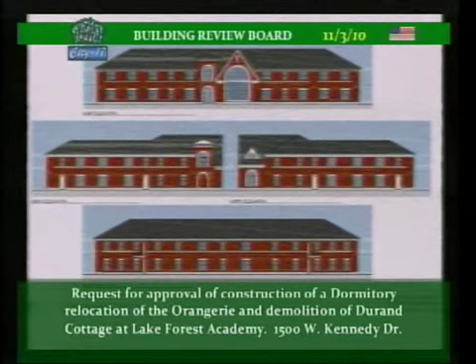The first was the window on the front elevation we had looked at—my battery's not so good, but basically the center window in the front. The thought was that the proportions of that window were a little peculiar and a little large, and we thought so too.

Oh, great. Right there? Oh, that was good. Thanks.

Okay, there we go. In terms of scale, proportion, and how it was subdivided, this was a little peculiar, and we've come up with a different solution, one more similar to what was done in Atlas and some of the older buildings. It's smaller in scale—you can't really see a person here, but a person is about 6 feet high, about that big. So we think this is a better solution in scale and proportion to the mass of that piece. The next is the site plan.

This is the original site plan we were proposing in our first proposal. You can see the parking that was here, the building location is here, and these were the trees we were trying to protect.

We met with the forester out there, and we concluded that this tree and these old maples along the old wall line are really not worth saving. They're in rough shape and have really lived their life, so it would be better to move the building east 10 feet to protect these—there's a couple of ginkgo trees and then these 3 large elms here. There are also 2 trees in this parking area which are not in very good shape, so we can consolidate all this parking.

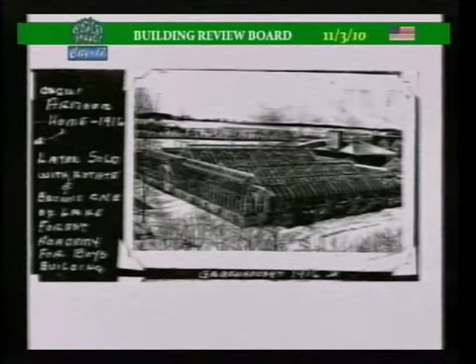And what our thoughts were was on that location, this is the greenhouses, this is the cottage that we're proposing to demolish, and then these are the old greenhouses, and this is the orangerie behind here. So when you were standing out in the formal gardens, which is to the left here, you'd look over top this, and you would just catch the top edge of this building.

So actually those pineapples on top of the building were pretty important, because you'd see them from the formal garden and see them over that way.

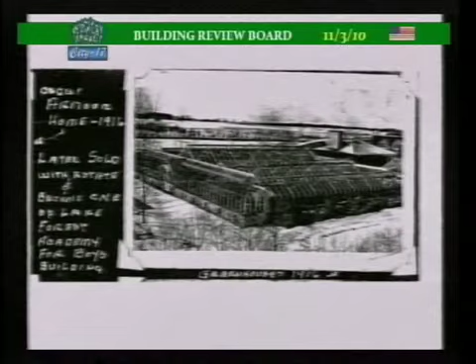I didn't really think about it that much, but as we looked at it more, this is just an original garden plan. So just to show you from a plan view, the orangerie is right here, the formal garden's here, and that greenhouse complex is in front of it. So you would stand here and look over top of it and see that front elevation that way.

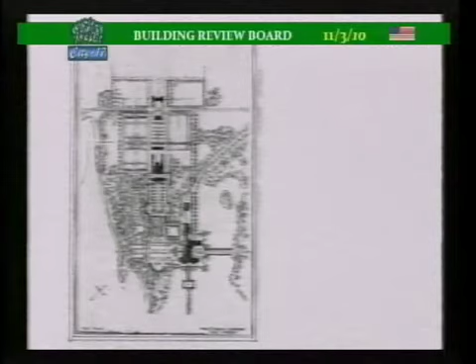As we studied this, we looked at it and said, you know, basically this is the front face, this is where it sits today, and this is where the formal gardens was. We were originally planning on taking the building and just scooting it this way and having the front face actually face west.

Well, we thought it would make more sense to move the building, flip it 180 degrees, and have this face out to the main green space, which is out here, so that when you walk down the axis of the different roads, you could see this building over top the one-story building, which would show those pineapples on the top edge of the building in the same way that it was over here.

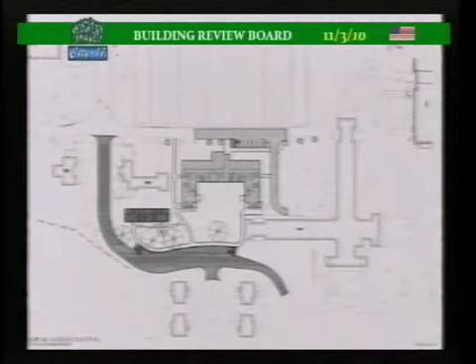And we said, okay, well, does that really work? So we did a quick little massing sketch. This would be if you're standing across the field hockey field on the other piece. That line is the one-story building addition that's onto this, and you see those pineapples on top and just the top edge of that building.

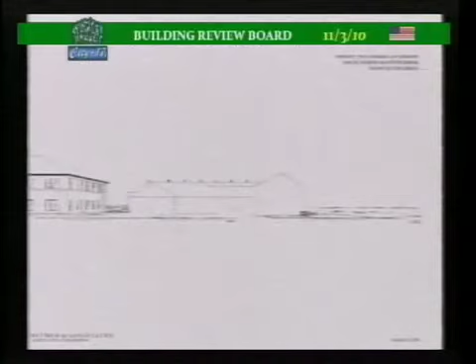So we think it makes sense to flip the building, have the front face the green in the public space here, and have the back, which is going to get hidden anyway with our back porch structure on the building. So we were proposing actually to turn the building 180 degrees from what it was and put the face front toward the open space.

The last thing we looked at in terms of the elevations was this is what we proposed originally, to have straight windows, and it was asked if we would look at integrating arches into the elevation, much like was in the original building. The original building was a one-story space, so they didn't have this floor line to deal with. All these windows were arched that went along here.

And we looked at 3 different schemes. One was if we just had arches, straight arches.

And this is back when we had the back of the building, which is this. You can see these piers don't come up all the way, as they are here. So that was our first scheme.

Our second scheme was if we were not to create the brick arches, but just infill the flat space. You can see these squares, that's where the flat windows are, and we had these little arch windows along in those residential units in the bedrooms. So those were the two arch solutions we came up with.

The economics of this: the first scheme is more expensive because we have to actually build these brick arches. We have to pull out the windows, build brick arches, and then stick the windows back in. So that was about a $40,000 to $50,000 upswing for that.

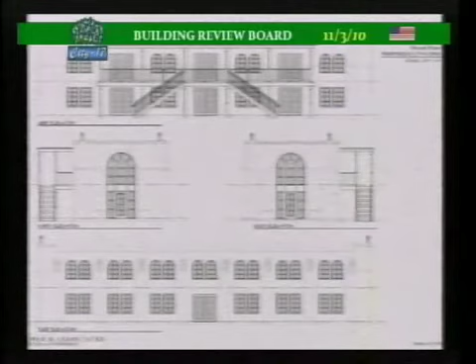In all the schemes, we still think the end elevation makes a lot of sense. We've subdivided it differently so that it really matches what we're planning on doing, or relates better to what we're doing in Ferry Hall, and we think it makes more sense from a historic standpoint too. This is the scheme that we're proposing, I think, that makes the most sense.

Why you'd save $50,000 or $40,000 isn't a lot of money in the grand scheme of things, the whole project, it isn't - but it does become a lot of money when we have a finite amount, and so where does that money come from? We have to take it out of the landscape budget or some other budget like that can be somewhat elective. So what we had $100,000 in for landscape now becomes 60 or 50,000. It really has an impact on what we do.

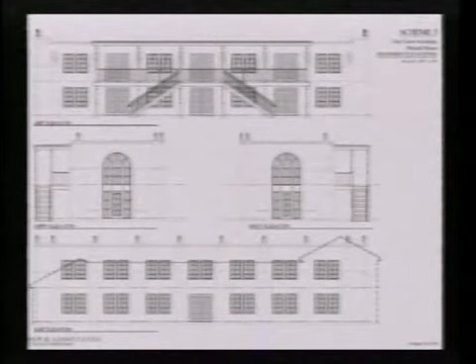This shows the building flipped around, which has the columns faced out to the street. This dashed line is the single-story Macintosh building in front of it. So you can see how all these windows you don't see from the center green at all, whether they're arched or straight. We use this just to indicate that.

The last piece was just a little better detail on our back porch detail. Basically what we're proposing is to use a whole steel structure so that these will be pipe columns and tube sections, which create the outer pieces. This will be metal deck underneath with a concrete topping, metal steel railings. All this will be painted a dark green or black and really somewhat disappear in terms of the elevation. So that was the last piece that we had.

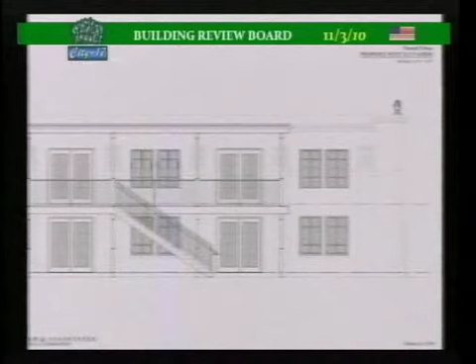The last thing we wanted to talk about was the demolition permit. I think we're comfortable now with a 2-year period. There was some question in our last meeting about the time frame for when we would tear down the building, the cottage, what we were proposing. We're comfortable now with a 2-year period after we finish the completion of the dormitory to demolish the cottage after that.

I think that pretty much covers the questions that I was aware of. If there's anything else, I'm happy to answer.

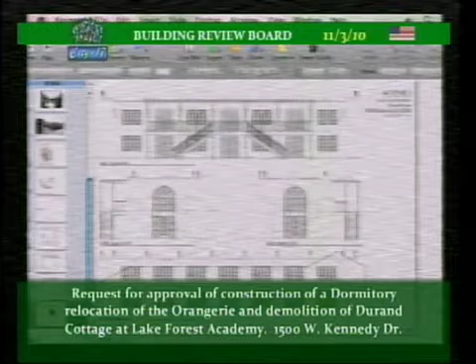Regardless of flipping the building, if you look at this, you see the piers on the east elevation, right? Right. And the buttresses on the west. Now go back to your other schemes. Yeah, and this is the opposite. That's the opposite, correct. So is one incorrect?

Well, one is taking the building one way and moving it, sliding it this way, where we don't flip the building 180 degrees. And the other would be flipping the building 180 degrees and putting it in place.

So as we look at this, we can interchange these things. Is it the piers we like, or is it something else? We tried to say, okay, what is the most important thing? Where do we get the best bang for our buck?

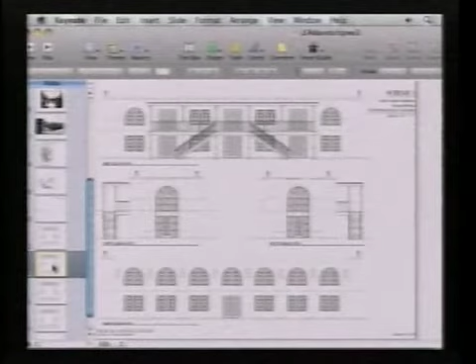Okay, and I thank you for the cost estimates. Does that make sense? It is a little bit confusing. But I'm not sure that's going to factor too much into the way I'm going to view it. I'm here to look at the aesthetics of it and make my recommendation based on it.

And then my other last question was the sidewalk that you said you took out. I'm just curious, and I'll pose it in the form of a question, whether you think people are gonna walk across the grass to get from sidewalk point A to point B, or if they're gonna go the long way around.

That's how we arrived at where we were. I was really thinking that, one, were people really gonna walk from the campus, come through here, down through here, and across here to get this way? If you really see the way that people get to West Campus or West Village right now, what they do is come down here and walk through a path that's right here. So it's more direct to go this way than through this and that way.

The other thing is, if we don't encourage people to go this way, we don't have them walking through a pretty tight area, basically the front of these residential units. It's better if they come this way. So that's why we eliminated that one.

The other question is whether people will park here and walk through this way to get through there. I would imagine they would, but I still think it's better to have foot traffic over those root systems than it would be to pour concrete over it. So I think it makes more sense to do that. That's it, thanks.

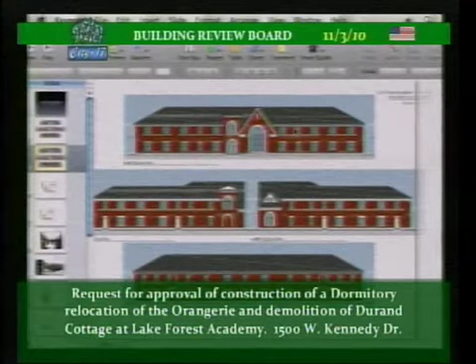We looked at that in terms of the number of spaces provided and the number of faculty units there. We went back and counted the number of spaces we need for faculty here. One nice thing about this parking area is there's no student parking and no parent parking - the only people who can drive back here are faculty, so that helps a lot.

One consideration is the safety of moving people. When parents come to pick up their children from the dormitory, they have to come through this area - that's really what this is. They're not allowed to go back through here, and students aren't allowed to park anywhere on this side - they have to stay on the other side of campus. That helps a lot.

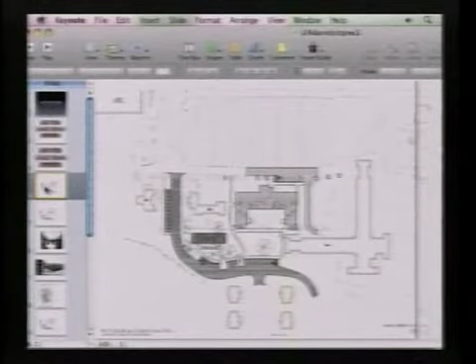The other consideration is that the number of parking spaces we need to provide for faculty - we feel this is adequate. If we were to develop this space in the future, we would have to add parking for additional housing that might go here. By eliminating this parking here, it helps the drainage situation we're creating, and it's much less intrusive into the existing structure. This house still has its 2 parking spaces, and it'll still work as it is today.

So all those will work the same. And then all these parking spaces will have spots for the faculty - there's 4 here, and then there's 6 there. Okay, I think we're fine with those.

So the parking for the gym is adequate, and at this point you don't think you need it for overflow? Would you allow the public to come back here and park? Basically, the overflow parking is in that lot coming down the other side. When they have an event, like the holiday event, or a big event, they actually park in that field. You can park in that field, and that's kind of how they handle that situation.

I had 2 more quick questions. Go ahead, John.

Peter, as I look at the elevation for Ferry Hall, on the bottom of the building it looks like there's something more than just the concrete foundation projecting out of the ground. Is that a limestone base? Yep, we have a little stone base that goes around the bottom. It's cast stone, the same that we use in the gym - basically it looks like limestone. Does that hold up to weather and drain okay? I mean, too many times I see limestone down at the base and it looks like it cracks pretty bad and falls.

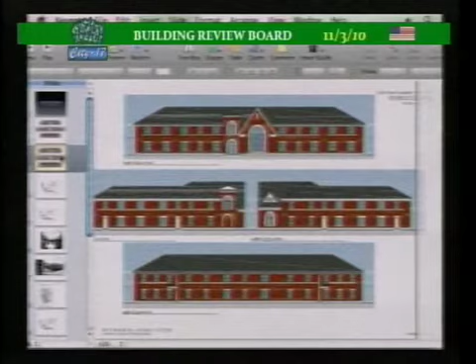You'll see them, you'll see them if they're white - it's white against black or white against red, so you'll see 'em. Would you be in favor, or have you considered doing a color to match the brick for the downspouts? I don't know - we have the windows, and the windows are going to be white too, that's what we have in the gym. It seems to make more sense to do it like the trim color.

Okay, no other questions? Charlie? One question, Peter. If you could bring up the site plan.

I believe when you were here last time, there was a wall remnant that ran from the original estate just to the east of that. Now, with moving this building about 10 feet, are you encroaching on the wall? You kind of had some vague idea what you wanted to do with the wall - what's the thinking on that?

We met with Susan Benjamin, trying to go through this and think through what are the relics of this thing and how it's significant. Her idea was that turning the building and that sort of thing was way more important than preserving the foundation of this wall. So now we're taking it all out.

I actually think that by saving that foundation to go along here, it just becomes kind of a safety hazard - kids trip over it unless we do something with it, and it's really sort of in the wrong place. In the future, we might consider a path that goes through this way to future things between those two, and we still have enough space to do that.

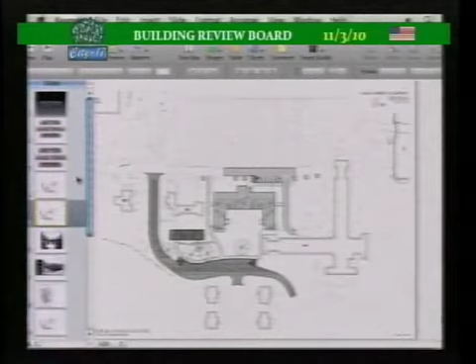I have one question for Monica. I think in our last meeting you questioned the size of the brick being used in construction of the dormitory, whether it matches the athletic center.

Yeah, I was questioning if it was matching the athletic center, and then I was pleased that he said it was going to be a smaller scale brick, which I think is appropriate because the dorm is a residential facility, whereas the gym has the bigger, larger jumbo brick. Is that true, Peter? Yeah, I feel exactly the same. I see that big jumbo brick and it looks peculiar.

Okay, I think we've covered it with questions.

Now is the opportunity for the public to comment on this project. Is there anyone who wishes to step forward and address the board? Seeing no one...

It is now time for any final questions from the board before we take it to discussion. I think we've been pretty thorough in our questions. So now is the time to deliberate.

Well, I like that I'm seeing 3 schemes here, and I appreciate the effort on estimating prices and presenting that to us for consideration. Of the 3, I'm not liking the double arched window, so scheme 2, I'm not a big fan of.

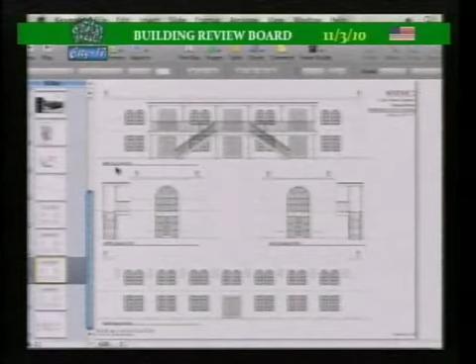But alternatively, the west elevation on scheme 1 — yeah, but that only has arches on the outer sections. Right, I'm just trying to creatively think of a way to get some arches onto one of the facades, one of the elevations. But I think we might be working too hard on this. I just think the big ends with the north and south having the big arch is really an adequate statement in itself.

So for the sides to be a little more simple - now, the sides were like the north and south at one point, were they not? Because we turned this into a 2-story building versus a 1-story. Right, and so getting back to historical significance, that was all one window to begin with, so even if you do an arch window, you're not going back to what historically was there, because it's been adapted and changed over the years.

So I think it seems our consensus is around scheme 3 as presented, right? Okay. Okay.

I'm just going to tick down the list of things that Peter addressed that we had asked him to address in our prior meeting.

Are we in agreement that rotating Durand House 180 degrees is desirable? Yes, yes. Any dissent to that position? So we approve that as well.

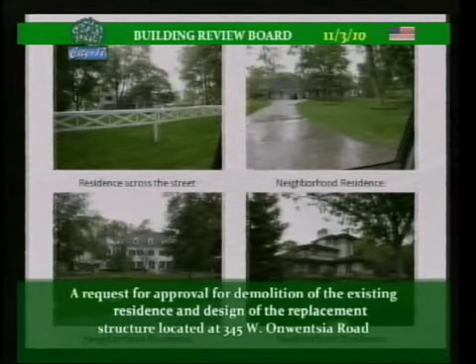Some other shots of the neighborhood across the street. There's a picket fence, a mix of styles—colonial homes—and there's actually a prairie-style home just around the bend on Onwentsia.

Some other homes in the immediate neighborhood—a mix of 2-story and 1.5-story homes. There are ranch homes on either side of 345.

So quite a blend. This diagram shows our efforts to look at trying to reuse the home. We looked at additions. Since the second-story option didn't work, we looked at other options, and they don't work either. There are some restrictions as far as setbacks from a zoning standpoint.

If you do an addition on the east or west side, those would be non-conforming to the required setbacks—you have to have 20 feet on this side. Actually, the setback on the east side is 50 feet because there is a public easement; this is actually city-owned property, which mandated a wider setback on the east side. The front setback is 50 feet. So the sides didn't work as options for additions.

There is an issue with the grading on the back of the property. It's low and the foundation is low, so adding structure on the back would exacerbate the water infiltration that's occurring in the back of the house.

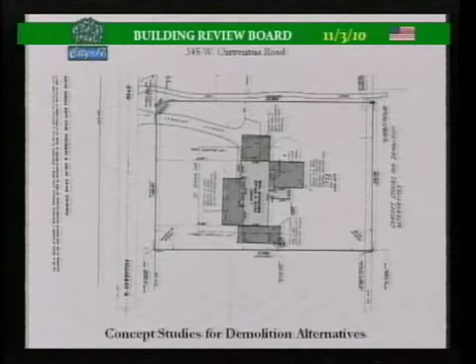And if you look at a front addition, we didn't like that because basically it would change the aesthetics of the house, and it creates too deep a house—you get too much internal space without natural light and ventilation. So we didn't like the idea of a substantial addition on the front.

So after looking at those options, and given the condition of the home—the structural inadequacies of the roof, the undersized framing, the foundation, and the amount of crawl space—it just didn't make sense to try to work with that house.

So we came up with a new design, and it's essentially shifted toward the street by 27 feet from the existing home. Part of the footprint is in the existing home's footprint. We still have 70 feet of distance from the setback line, from the property line to the front of the house—50 is required, so we're still an extra 20 behind that line. There's a significant parkway dimension too, of 20 feet, so there's a nice distance between the street and the front of the new home.

The garage is side-loaded, which is a nice feature, so the doors aren't visible from the street.

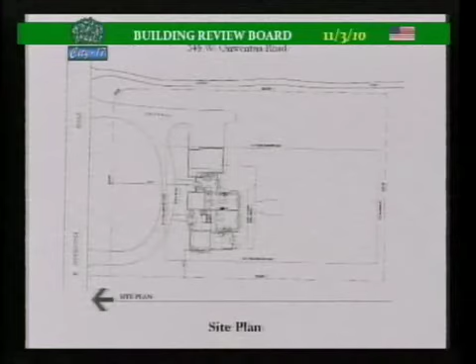I'm going to go over the landscape plan. I'm going to go to the architectural rendering of the front of the home.

So the architectural influence is French Norman farmhouse architecture, and so some of the elements, or a lot of elements that you see in that architecture is inherent in this home.

Some of the features are a rustic brick on the exterior, the use of heavy timbering around doors and windows, a hip roof, and also arched dormers that penetrate the eave line.

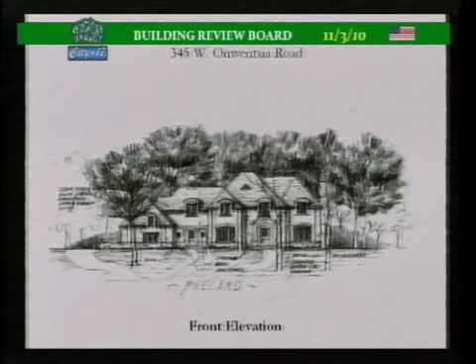So it offers asymmetrical balance and a 1.5-story look, so it kind of nestles in better, doesn't show as much elevation to the street. So I think it's going to be a very quiet home.

The brick that we're considering is a Chicago Common brick, and then the trim color is going to be a sage green. They are casement windows that are simulated divided light windows. It's a cedar shingle roof. There are some limestone treatment around the front door.

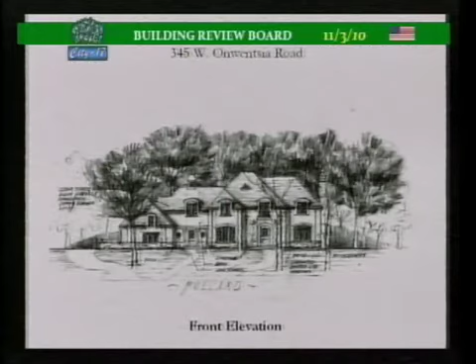This is hopefully a little bit clearer. This is a line drawing of the front of the home. The gutters are aluminum and downspouts are aluminum. There are some decorative leader boxes.

The color will still be the sage green. Soffit and fascia is sage green, as well as the window color. And then the brick is a tan buff color. Chicago Common is kind of a neutral tan.

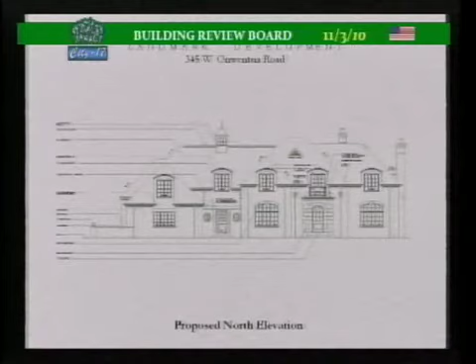The detailing is consistent on all sides of the home, the timbering above the windows, the arched topped dormers, same brick on all sides.

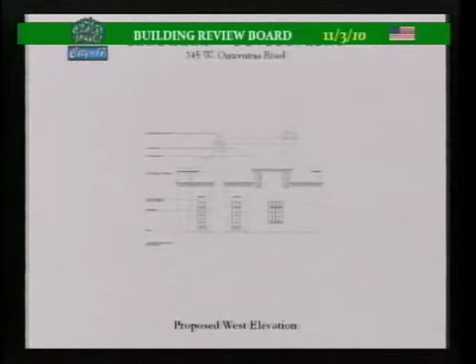This is the garage elevation. Apologize, it's a little light. Here's the opposite elevation. So the elevations that show to the neighbors are fairly narrow.

Most of the roof is at 29. What's allowed on this almost acre site is 35 feet in height, so we're well below the maximum. Also, the bulk is below the maximum allowable.

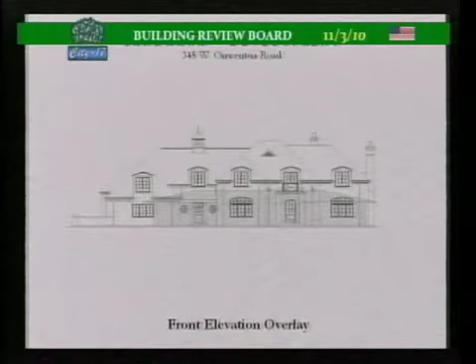5,100 square feet is allowed approximately. This is 4,800 square feet, so it's 7% below the maximum allowable.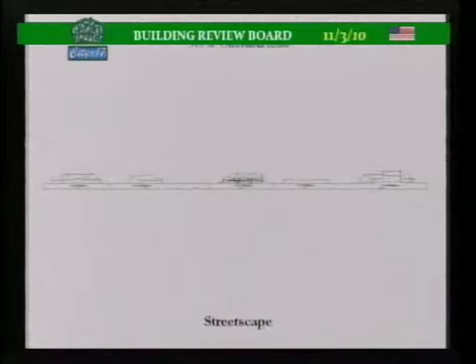This is the streetscape. You can see there's a large amount of space in between the property and the neighbor to the east. There's that easement, and that's creating that distance plus the setback that's required for the pollards. So there's a good amount of distance. You can see some homes of similar size and height in the area.

The floor plan, I'll skip through. The roof plan section. The nature of a 1.5-story home is that we have these shorter wall heights at the exterior. They're 4-foot knee walls for the most part.

But again, that's an effort just to keep the height lower, and I think that nestles into the landscape much nicer.

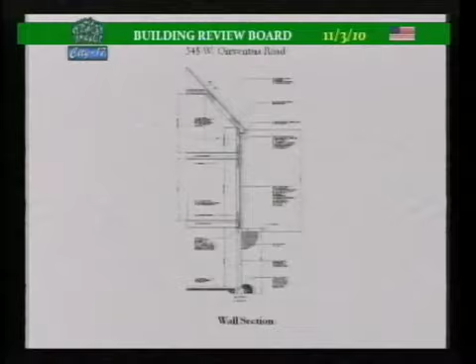So addressing the demolition criteria, there are 5 criteria, and I believe that we meet all of the required elements of the criteria. Number 1 is the existing structure itself, in relation to its surroundings, does not have special historical, architectural, aesthetic, or cultural significance to the community. So this criteria is met.

There are no records to show that there's any historically significant significance to this home. Criteria number 2 is realistic alternatives, including adaptive reuses, do not exist because of the nature

or cost of work necessary to preserve the structure or to realize any appreciable part of its value. And I believe this criterion is met as well.

We explored those modifications through additions, a second-story addition, and once you go through all that, you really don't realize any positive, there's no positive elements to keep that home. It's just too altered, and it becomes significantly altered, so it doesn't make sense to reuse the house.

Number 3, the structure in its present or restored condition is unsuitable for residential or a residentially compatible use. Fire or other casualty damage or structural deterioration has rendered the structure an immediate health or safety hazard. I don't believe it's an immediate health or safety hazard.

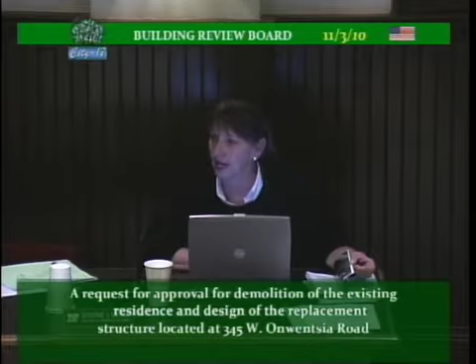The staff recommendation is to approve the demolition as well as the replacement structure. The conditions recommended are really the standard conditions that you see with many demolitions and replacement structures. Nothing really unique on this site that hasn't already been addressed or that needs careful attention. I would be happy to answer any questions. Thank you, Kathy. Any questions or requests for clarification from the board to petitioner or staff?

I have a question for the petitioner. John, why did you bring the house that much further forward to the street? I'm concerned that the streetscape will make the house look that much more massive, especially now that you're between two ranches, and bringing it forward is going to make it look even more massive.

Well, a couple of reasons. One is that there's an elm tree in the back, and we wanted to pull away from that because we feel that's the significant tree on the property. So we really like that tree, want to make sure that we stay far away from it to protect it. That was one of the reasons.

Secondly, we are looking for some more buffer. Highway 41 is very close in the rear, a little bit to the south and west, and so we felt it might offer a little bit more opportunity for landscaping, some more buffering, pull away from the noise. And we felt there was enough distance from the street to the front of the home, that it wouldn't be a major change in its appearance from the street.

Okay, I'm just concerned because that whole line of homes on that side are all pretty much at the same distance back off the street. Right, I did look at that. I believe the front of the Pollard's home is going to be even with the ranch home to the west. So pulling it just forward, it won't be any further—just a corner of it, not really the whole front of the house. It would definitely be that whole 20 feet more forward. Right. The whole home is going to be even with the home to the west, the ranch home to the west. It won't be any further than the home to the west. East, I couldn't tell you how it relates to the home to the east.

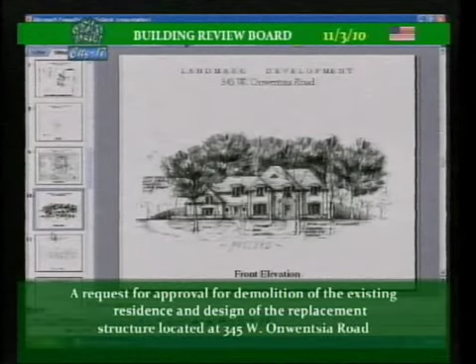Comparing the two, the rendering displays the dormer over the garage at a lower elevation than the line drawing. Yes, it sits definitely lower. What's the intent, is it the line drawing? It's the line drawing that takes precedence. That is a bedroom, and when we did the egress calculations, we needed 2 windows instead of 1 for light and vent. It looks nice on the rendering, but the code got in the way there.

To me, the style of the home does seem to be more of a formal French eclectic style. I don't really see too much of the country French in it, so I'm wondering, do you feel the cupola is consistent with the style? Yeah, I like it because it's kind of a farm element. I know what you're saying, but there's asymmetrical roof lines, but it's balanced.

I like the idea of the entry roof line being a little bit taller, and I think that helps balance the rest of the roof line with it. So I do like the cupola. I think it's a nice element that would work with the house.

Over your arched windows in the dormers, do you have a brick jack arch above that? That's right, it's brick. And when I look at the timber arches over the windows on the first floor, you have a flared header, but you've kind of inverted it, so the jack arch on top is flaring out this way, and then you've got the timbers going the opposite way. I wonder why you've chosen to flip that.

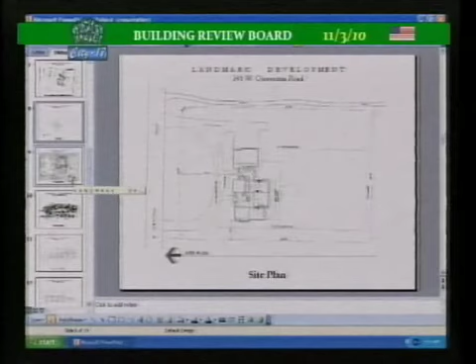I'd have to give a guesstimate - I'm gonna look at something that I can hopefully give you a somewhat accurate dimension. Is this more than the existing 20 feet? It's 25 feet from the edge of the driveway to the property line. I do have the driveway fairly wide in front of the garage, and that can be narrowed. It doesn't need to be probably that deep, but we're trying to keep that curb cut and driveway configuration in the same location. So we're working with that - I think that really has a lot of impact on what we do.

Yeah, we want to keep that tree that you're mentioning, that's to the east. That's the plan, to keep that tree? Yeah. Okay.

Any more questions from the board? Hearing none, now is the opportunity for the public to address this petition.

I just have one comment to make. Ma'am, if you could step forward to the microphone and identify yourself. You could use this one if you like. Thank you, I'm Dorothy Gottschalk.

We're concerned a little bit at times when the soil erodes and goes into that drainage. That's a problem. But also with the two berms, I'm getting water up to my two large trees in back, which are two large elm trees.

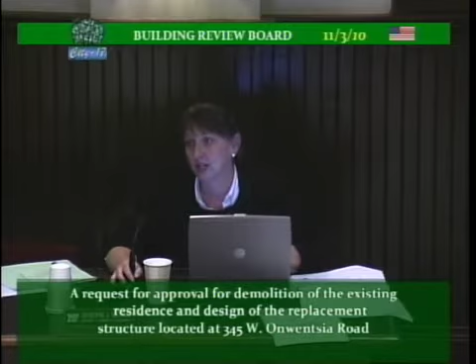Certainly, we will note in the records the concern of Ms. Gottschalk and make sure that the city engineer pays particular attention to that side of the property. But the fact that the grade on this property isn't changing really is significant, because if the grade was changing even a little bit, this is a low part of the community, so drainage is a concern. But we believe the minimal change proposed on this property and any additional drainage improvements, drain tile, whatever that will be required for this new house, will certainly not add any water to the neighboring properties.

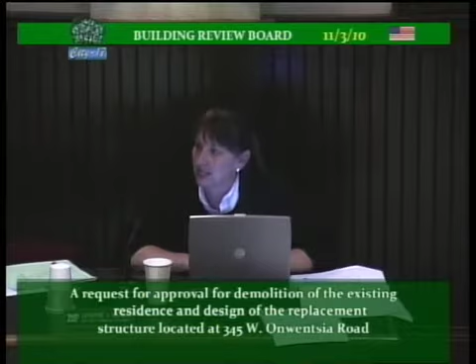Kathy, is there a storm sewer on Onwentsia? There are storm sewers in the area. I can't tell you exactly where they are, but yes, this area has storm sewers as opposed to some other areas that just have ditches.

Thank you, Kathy. Are there any final questions from the board to petitioner or staff? Hearing none, then let's go to discussion with respect to this petition.

Drainage and water, actually, when I went out to the property, the very first thing I wrote down when I pulled into the driveway was low. This is lower than anything to either side and across the street and that kind of thing. Knowing what water does, that was my biggest concern, and to hear Mrs. Gottschalk suggest that she's getting water, I think she was maybe holding a bit of her tongue and maybe underestimating.

There's a big berm in the backyard that runs along the property line. The thing's as big as a building in itself, but when you put another berm someplace else, you're creating or exacerbating potential water problems, and we certainly don't want that to happen to a neighbor as a result of this.

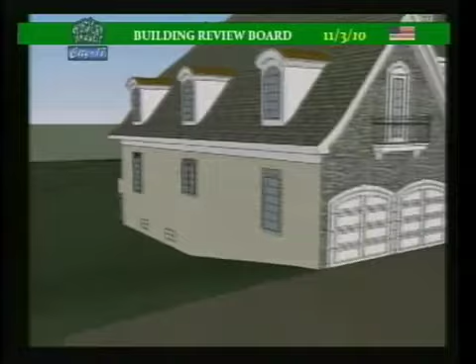With that, if you give me the site plan. I might add that on the previous project, we talked about drainage and architecture to really start that project off. In this particular case, drainage is the driving force.

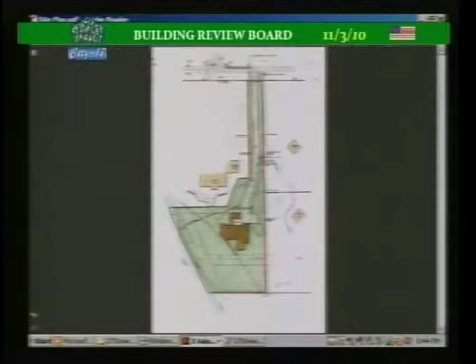Can you give me the site plan? Yeah, and as Bob mentioned, this is a flag lot, or a lot in depth. Onwentsia Road is located right here. We have about 45 feet of width that runs down the flag portion. It breaks open a little larger here and then comes to the bulk of the lot.

There are three existing houses in the area. There's the house here that enters directly off of Onwentsia. The newer house, located here to the east, takes access directly from Onwentsia in front. And this lot next to it to the east is also a lot in depth or flag lot, which has a driveway over a little further east here.

There are a number of things that are the driving force on the site plan, particularly we have a 20-foot setback line right here, a 50-foot setback line right here, and the regulatory floodway right here. This is our building box right here. The existing floodplain line runs through this area this way.

We've been working on this site for approximately a year. It's a challenge in regards to the floodplain, and through the engineering and through our FEMA CLOMR request, we were allowed to do some fill to bring the driveway in and bring the courtyard into the front of the house right here. In doing so, we had to provide compensatory storage in other areas of the lot, which we did.

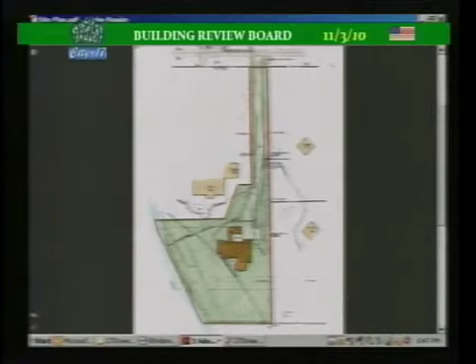If we go to the landscape plan very quickly — just very quickly, the house location here. The dark pattern that you see here would be the provision where sod would be placed.

The remainder of the lot in the back here, we're proposing a wet mesic prairie mix. We're trying to keep a very natural look in the back of the house, and because of the flooding conditions there, this is a mix that we use in a lot of stormwater management areas. We're going to augment the existing plant material with new plant material that can handle getting its feet wet and is conducive to areas like that.

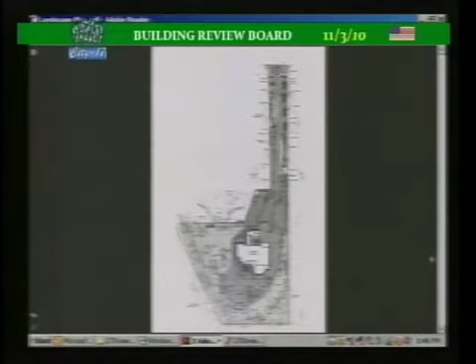The driveway — the clients are very concerned about impact of impermeable surfaces. Can you blow up the driveway a little bit? The proposed driveway calls for 2 bands of permeable pavers on either side, and in the middle of the paver will be grasscrete, that concrete matrix that has grass growing within it. So the entire driveway is permeable.

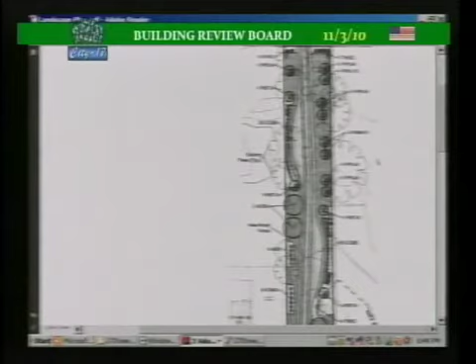These little bump outs that you see were done at the request of the client because it is such a long driveway, to allow a car to go to the side while another one is passing. These bump outs would look just like turf. You wouldn't see it — you'd have the concrete underneath it, the turf. So really, the only image of pavement you'll see are the 2 ribbons of permeable pavers for the wheels.

As you get down farther, can you pull them down a little farther? As you get down farther, we have a kind of a land bridge here that will be all permeable pavers, with one garage here and another garage here and a backup area. This area is lower on each side, and there will be a railing or a fence that runs along the edge of the kind of a drop off that's there.

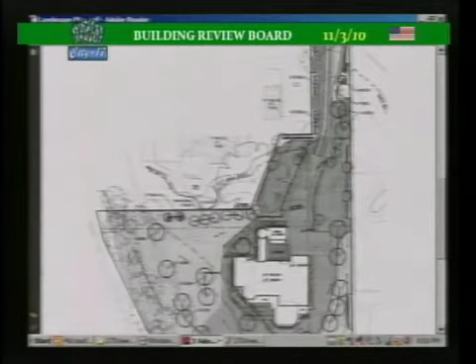Existing fencing — the whole majority of the east property line has 6 or 7 foot stockade fence now. Our proposal for fencing would start at the wooded section here and run along the property, down here, and right to the edge of the floodway where we have to stop.

I hear the buzzer. Can you get me to the building scale?

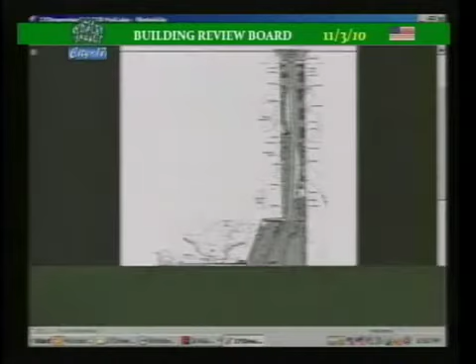We've run into an issue with the building scale. Under the current calculations, staff has calculated that we're running about 2,200 square feet over the building scale, or quantities of bulk. The reason for that is the exposed back area of the house.

Under definitions, anything over 3.5 feet is considered in the bulk if you have an exposed basement wall or crawl space wall, which we have here. I might add that under the house here, the crawl space is not going to be inhabitable. There's not going to be any mechanical equipment or anything that will be allowed to take water. You see the vents located on the side of the foundation here — water will be allowed to come in, and then water will be allowed to come out as part of this design because of the floodplain situation.

Even though it's not inhabitable, based on the calculation requirements, we have to include that in the bulk calculations, which, if this site would be a normal site, we would have a normal basement and we wouldn't have that situation because we wouldn't have the exposed wall on the back of the house.

We looked at a few different ways of dealing with that, and we're not very comfortable with any of them, quite frankly. I think at this time we're going to ask your opinion on asking for a variation in the bulk requirement because of the site conditions. I think we qualify under some of the standards for a variation for bulk because of this situation.

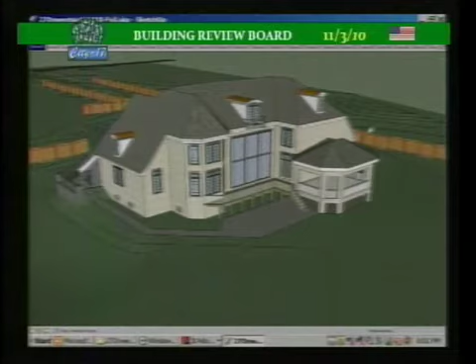We do have our entire design team here, including the architect. I know our time, 10 minutes, is up, and we're here to answer any questions if you wish. Very considerate of you to consider the time restraint. But given the complexity of this petition, I think what might be appropriate now is for the architect to review the elevations and the design details. Would that be agreeable with you guys?

Hi, my name is Sean Purnell, I'm the architect for this project. I'm sorry, what was your last name? Purnell. Okay, thanks. Who's Mr. Minchello? He's back there. Is he the architect or no? No, he's the contractor. The reason I've given you the business cards is so you can have an idea who we all are. Sean Purnell is the architect. All right, very good, thanks for the clarification. Proceed, thanks.

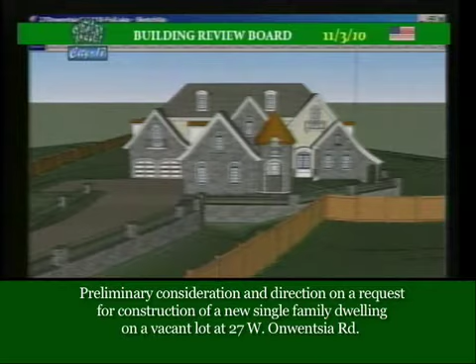Obviously, a lot of the design decisions spring from the homeowner's desire for a French eclectic, French country style of home, coupled with the fact that we're not presenting any sort of typical streetscape frontage. The lot is stacked in a very unusual way, and with the floodway cutting through the rear portion of the home, we had to propose creative solutions for how to get the garages to work, and how to get a very unusual offset axis drive to work. So we chose an architectural style that allowed itself to be balanced without relying on symmetry.

Or a form that would be very difficult to achieve given the lot constraints. So we've tried to keep the massing of the home as simple as possible given those constraints. We've tried to present a 1.5-story design scheme that softens the bulk as much as possible. We've selected stone and brick with copper accents throughout the elevations of the home, and archtop windows with copper accent dormers.

Oh, absolutely. I kind of figured you might have a question or something. We will—we're going to ask staff to comment and give us their thoughts on the petition, and then we'll go to questions. So, thank you very much. Staff, would you like to report on this petition?

Thank you, Chairman Culbertson. First, I wanted to give you a little background on this lot. It's a property that city staff has been working with the petitioners and their representatives on for, someone said a year, but my recollection is it's been much longer than a year. It's a very, very complicated property. It is impacted by floodway and floodplain, and as was stated, it is a buildable lot. However, if this property came in today to be subdivided under our current subdivision code, this lot could not be created because no portion of it is unencumbered by floodway or floodplain.

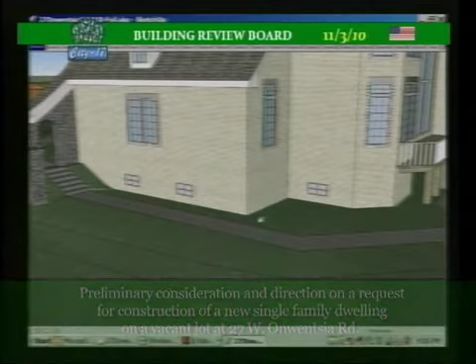I'm just asking questions for my own edification, trying to better understand it. So how does the water travel out of that lower level? It travels out the same way it comes in. So water goes in and out the same vents?

Right. I'd like to say too, if you've been on the property, you know it's very low. We're lowering it slightly. We've mitigated some wetlands that are on the property, and we're adding drainage throughout the area.

You have a detention pond on the corner there? It's not a detention pond, it's retention. No, it's actually called compensatory storage. There's no detention required for it. It acts virtually the same way.

Will that water that comes out from underneath the home go into that compensatory storage? Yes, it'll go into the compensatory storage just on the west side of the home, into a storm sewer, and then out to the creek.

So how will it travel from there to there? It travels through the vent system. And it's just gravity? Yes.

And then out from the compensatory storage, is it expected to just recede, or do you have it going out to the ditch then? There's a discharge pipe that goes to the creek. As long as the creek is up, the water will stay in this low area on the property. As soon as the creek goes down, the water goes down, just like it does now.

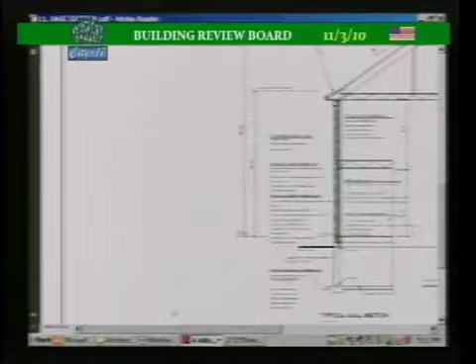I just want to follow up on the whole drainage through the basement. Are those vents, then, are the bottoms of the vent at the top of the concrete slab? So when there is water in the basement, is any water in the basement going to directly be able to flow out the bottom of that vent? Because if there's any kind of curb, your water is just going to be sitting in that basement, right? Is that correct? Are they sitting at the bottom? At the floor level, yes. At the floor level, okay.

So then only part of the basement is really configured to flood? Because on the front part of the house, you don't have any of those vents. So any water that's coming in is going to come in on the back side of the house and hopefully flow out. There's quite a few, but nothing at the front of the house. Is that correct? Correct, there's none at the front face, the north side of the home. They're all, there's 8, what's called quad vents, a special flood type vent made for this particular application.

And is the basement habitable? Are there steps down to the basement at all? It's a crawl space. It's 5.5 foot tall, and no, there will be no access from the habitable portion of the home to the crawl space.

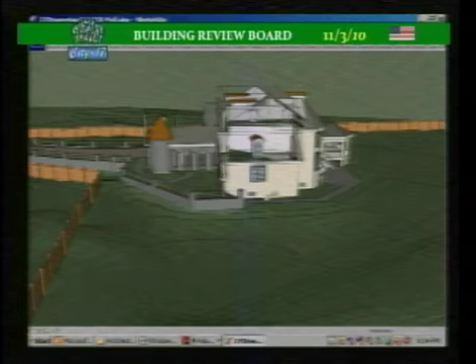It'll go out the same way it comes in. But earlier, when I asked where the water headed from the basement, you said it went to the compensatory storage, which is only in one area. So is the basement sloped to channel the water from under the building to that corner? And if so, the water's only heading out in one direction, even though it may be coming in from more than one direction. Am I correct or not?

No, it can evacuate the same way it goes in, because the height of the water is going to force the water out in the same direction. As you get very low in the water levels... keep in mind that water may get up to 3.5 feet of depth in the crawl space area. You have 5.5 feet there. So water will be forced out as it starts to recede out of all the vents. As it gets lower, it'll just be coming out of this side.

Okay, but all of it will go to the compensatory storage area. The crawl space area is calculated as part of the compensatory storage area. Okay.

Is there any system in your plans for taking care of mold, mildew, and dampness even after the water is out of there and into the retention ponds and maybe even back into the creek? You're still going to have dampness, and I was concerned about mold and mildew creeping up into the house.

All the construction materials within the 5.5 foot area are waterproof, so it'll be some type of waterproof material. Once you get outside the home, the plant material in the compensatory storage areas will absorb the water rather quickly. I don't expect there'll be any problem outside the home.

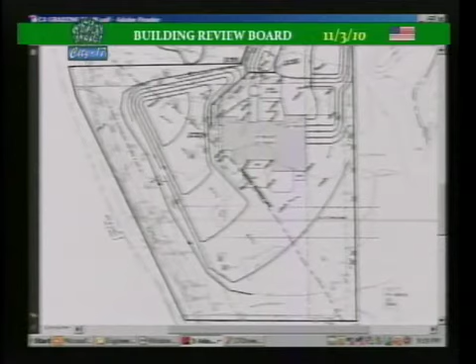So if you were to step into that area, you might feel a current on your leg. So that creek running through there is the culprit causing it to overflow into the floodway, which by definition is still part of the creek because it has a current, until you expand further into a floodplain, which is more of a temporary water retention area as it retreats back to the floodway and finally, in a dry situation, back to the creek itself. That's a pretty good understanding? Pretty good understanding, yes.

The floodplain is considered the entire area that floods in a 100-year storm. The floodway, are we suggesting that might occur every 5 years? How often does the floodway that has current, how often does that have water with a current or water period?

I see the location in blue, right here on the west side. At this location, this is the 100-year floodway line during the 100-year flood. What happens to water that gets underneath the building, and how often does that occur? This will occur approximately every 5 years as it enters this area here.

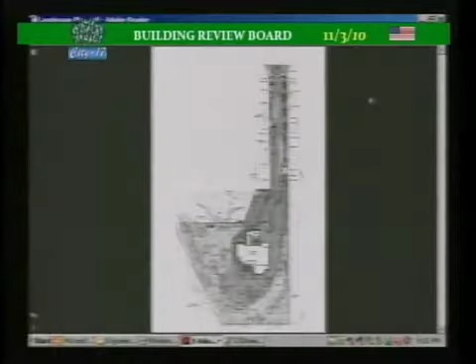It obviously has a mass and a height, and one of my other questions is going to be this bulk overage, and exactly where it is, but I'll get to that in a minute. You're going to be changing the grade of the site everywhere — so the trees that you've surveyed that are existing, are those all impacted by regrading of the roots around them? No, they're not. If you look at the site here, there are a number of trees that border the flag portion here. A majority of those will stay.

A majority of the trees in this area will stay as well. There aren't a lot of existing trees in the center area, in fact very few. We are taking some of the scrub box elders along this fence line out.

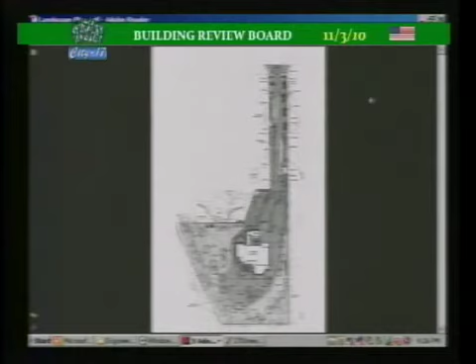There will be some grading in here, but they're really not going to take out a lot of the trees. And the grasscrete and all of the efforts I see in your details, is that because you need pervious surface to qualify for FEMA approval?

Not at all, that has nothing to do with it. That was purely the wishes of the client that they wanted to do that. Good. I might add that the entire site is about 10% impervious, which is pretty good for a site and house this size.

Did you do appropriate soil compaction tests to see that this thing doesn't need to be on caissons? I believe there's soil borings that have been done, and as far as the engineering goes, I'll send that to you. We have retained a soils consultant for the project, so as we construct the fill, he will be consulted for any work that may be necessary for caissons. At this time we're not expecting it. There's a lot of sand on the site.

Do we need to make a contingency on soil borings for the city's purpose, or do we just leave that up to them? I think the engineering requirements will take care of that. But you're not approving anything from a legal standpoint tonight, so do you care whether they put a house on bad soils, or should that be a contingency in our approval? We're not approving it, okay, we're just noting it. Well, anyhow, I would recommend you get soil borings on that.

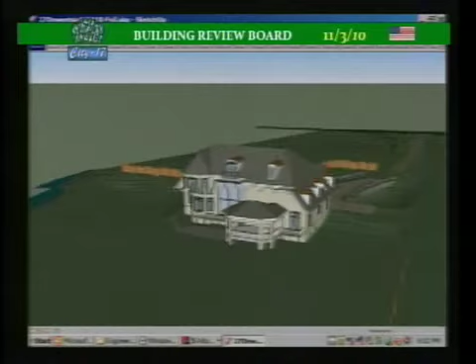Well, here's the drainage — you can see in a 3D perspective that the water's coming through this low area right here and going around the house. It's coming through this area, right through here, and around the house back over to the creek. Okay, okay.

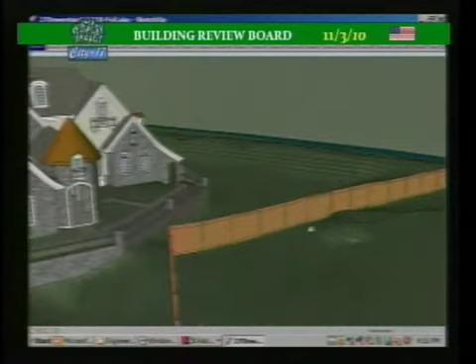I have another question. What is your finished floor elevation compared to the finished floor elevation of those two neighboring homes? They're very similar in height. I looked at them just before I came in — I'm going to say within a half a foot. Both of them are within a half a foot of this elevation.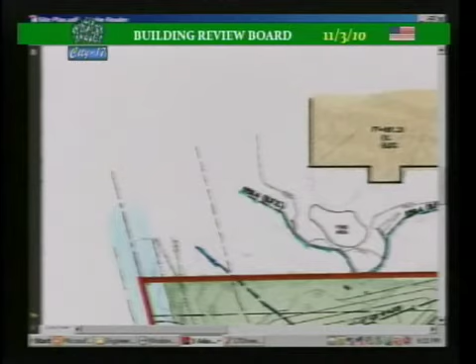I think we have it there, Glenn? Yeah, let me try to find it. 66121 — there's 661.21 to the house to the north, and this one is 661.45. So this one's slightly higher. I'm sorry, could you say that again? All right, this one to the north is 661.21. Thank you. Our house is 661.5.

And the one to the east is 658.0 — 652.45. 62.45. So this one's about a foot higher than what we're proposing, and this one was within a tenth of a foot.

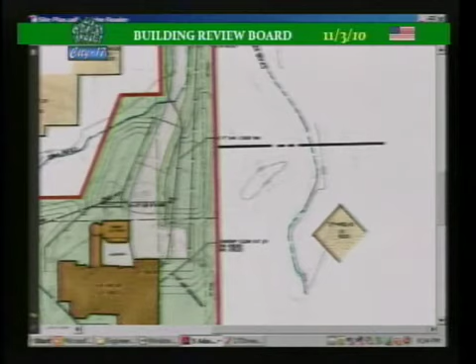Where are you getting 9,000 cubic yards of fill? I'm assuming maybe 20 to 22 cubic yards in a truck. That's 400 trucks — where's it coming from? From the site? Yeah, it's actually coming from these excavated areas. So you're not trucking in 400 trucks of fill to this property? No. It's all balanced? The site is balanced?

Does it balance? No, okay, we may have to haul some out. Okay, but there's not a substantial amount being brought in or being taken out? Not hundreds of trucks — not substantial. I guess you'd have to qualify what substantial is, but I'm going to say not substantial. That's good enough. Wow, I'd like to — go ahead.

I think it would be helpful to have a foundation plan for further discussions.

I was going to turn to the proposed structure itself for a minute, just to discuss some elements of that. What style of architecture would you call this? I would say it's French eclectic. It's obviously unusual because the detached garage obscures what you'd see as a more typical front elevation, on the lower drawing, which shows a cut through the courtyard section.

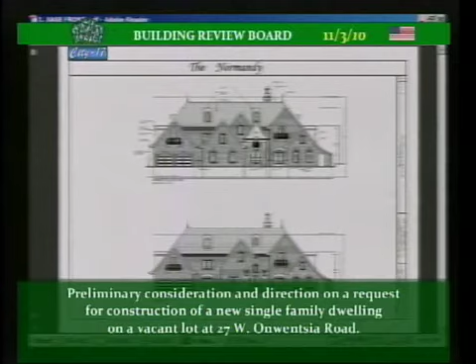I don't see a lot of symmetry with window levels and regularity of size in door and window openings or arches. They seem to be very scattered and erratic. So my personal opinion is that this whole design needs to be cleaned up a little bit and perhaps simplified. I certainly don't want to try and design the house for you, but right now I think it's kind of all over the place and it needs to be refined.

Yeah, the massing and the roof lines were especially difficult to accommodate the designs of the owner with the sort of very odd shape that we're trying to make the house conform to, which led to some emphasis placed on the organization. I don't think symmetry is really the right word with this style, but the balance of the front. And then as you get near the floodway, the truncation of the geometry of the home is causing some challenges.

That's certainly, no, I'm not arguing for symmetry all the way around the house. Asymmetrical is an aspect of French eclectic. Sure, but nevertheless, there is generally some kind of symmetry on the face of the building that doesn't jar the eye. Do you have in your 3D rendering a shot from the perspective you would actually have coming down the driveway? Because you're showing the front face and you're showing it from a higher angle.

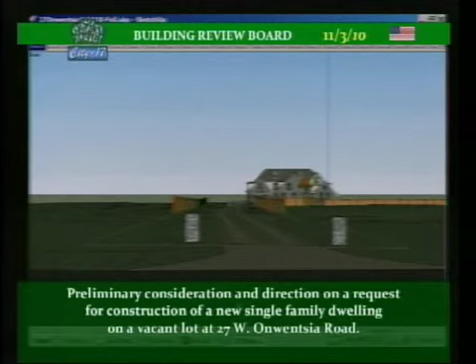I mean, between the distance and the foliage, you're obviously not going to perceive the home as part of a streetscape. I'm not asking for a streetscape, I'm actually asking if you were further down the driveway, what you're going to actually see, what's going to be your perspective of the house itself.

Right, so maybe go to the front of the footbridge, angled in towards the two garages, if you're able to do that. So that would be your approach perspective. Correct. Thank you very much.

Would either of my architect colleagues like to jump in? I have a question, maybe for staff, maybe for Lloyd. If the big problem here is bulk, and the board is going to say that's too big of a bulk here, we could spend another 3 hours talking about architectural detail. I'm curious, since this is a directional meeting, if the decision is this is too big a bulk, we're going to need a drastic reduction and the design's going to have to change, do we want to hash out all the specific architectural details, something we're just going to reject out of hand anyway? Or at least give direction that this is not something we're interested in pursuing? I'll just throw that out. I don't know if that's a question, but I think it would save people a lot of time if that's the direction we're headed.

I think that's a very, very good point, Charlie. I think maybe we'll take that issue up when we get to discussion amongst ourselves. Well, I don't know, Kathy, what do you think? This isn't exactly your formal petition procedure, this is before you for preliminary input.

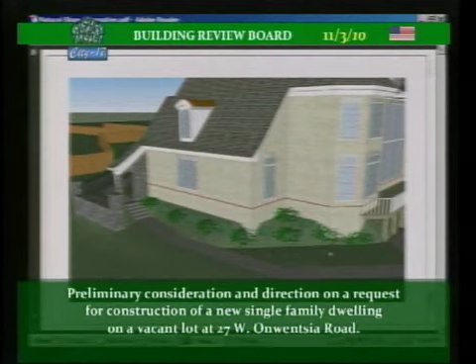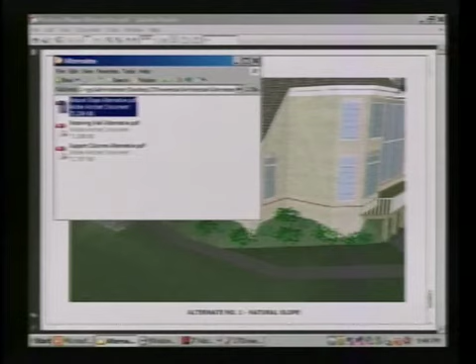One of the solutions we thought was simply to slope up some soil, either at 1-to-1 or 2-to-1, up to the edge of the foundation, just below the 3.5 feet, to give less bulk so it would comply. That was one solution. But what happens to the water? We'd have to deal with that water entering and leaving through a pipe or flume system. We didn't like that particularly well.

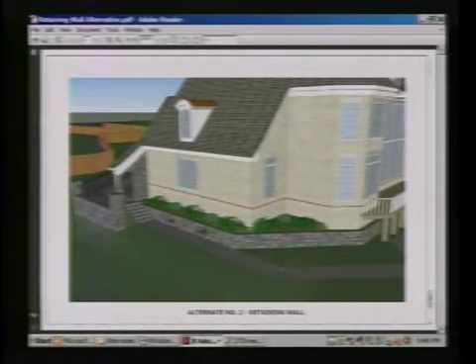The other solution is to do a retaining wall, so that the soil within the retaining walls would be within the 3.5 feet. That would again be open to interpretation as to the bulk. And I think one more was to do something completely in the air, and again the bulk is still there. Obviously we didn't like this one either. I think all three of them really don't serve the purpose of the design and help with what it looks like.

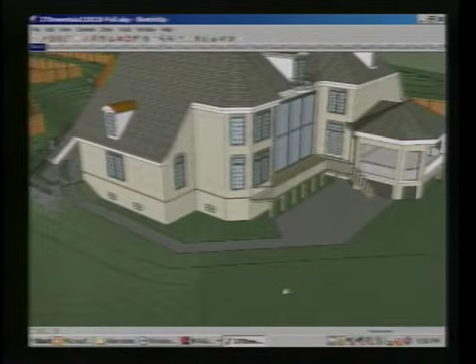Kathy, has staff seen those first two proposals? I believe Ms. O'Neill saw about those, but engineering has not reviewed them because we didn't know which direction we were going, and we didn't want to take up more engineering time and fees. So the addition of any more soil on this property, we do need to work that through engineering.

Would either of those first two proposals dramatically reduce the bulk? Well, it's a matter of interpretation. The building scale ordinance does not anticipate that you take these false measures to mitigate the mass, but could an interpretation along those lines be a basis for at least a variance? I think that would be up to the board.

Are retaining walls such as those presented there calculated in bulk? Based on the appearance of height, it wouldn't be. What is the height, do you recall? The height that's necessary, or that triggers bulk, is 3.5 feet. Here would be the finished floor, and it would be 3.5 feet between here and the grade.

Well, what does the board think of this whole issue? I'd like to know if those are truly viable alternatives. Well, I guess so would we. And that's the question.

From an engineering standpoint, for the water situation, are they viable? From an engineering standpoint, we could make that work. We'd have to make that work. The volume would have to work, the numbers would have to work. Okay, so clearly it would be a different design than what you had, but it is viable.

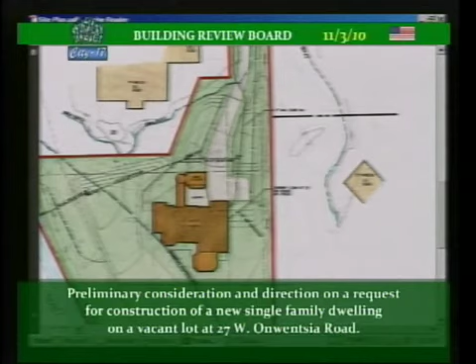The way the property is positioned with their collection area, their compensatory drainage area, at the northwest portion of the property, they're planning to push that, or pipe that, through gravity fed down into the creek. And obviously the issue is south of where that plan is created -- you can see right about where, on the left side of the creek, there's a couple little markings there. That's about where the drainage tube for the Onwentsia Gardens properties are.

That's obviously downstream, so now we're looking at pumping a tremendous amount of extra water during heavy rain into an area that's surrounded by 7 fairly large homes. The majority of the homes are probably a little bit less than 4,000 square foot homes. So again, we're talking about a very large home with a very large amount of water that's going to be displaced at an inopportune site to 7 homes, not to mention some of the other homes downstream within Onwentsia Gardens. So that's a pretty significant concern for the association.

Additionally, the 2,200 square foot variance is fairly large and probably as large as many of the homes in town itself. So I don't think there's an objection with the home. I think the size is very large. It's more about the displacement of water on natural land. It's been vacant, absorbing water, and now that water is going to be pushed back into a creek that's already taxed.

And the vegetation and trees - the association clearly doesn't want to see another building, and the new home clearly doesn't want to see the association homes. So we'd like to see as much of that natural vegetation and trees that would shade that area and the home remain in place.

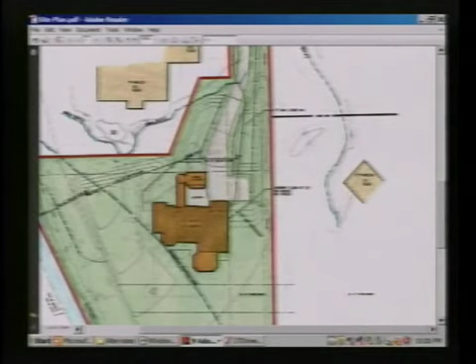Thank you, Mr. Stearns. Is there anyone else from the public who would like to address the board? Seeing no one, I'm not sure if you'd like to respond to any of that testimony.

Right, two points. First I'll raise one, and then I'd ask Mr. Christensen to raise the other. As to the water, I believe you've heard it said tonight that we're actually keeping more water on the site after we get done with this project. So we're improving the situation in the case of a flood, not making it worse.

And I appreciate the neighbors coming and raising these points. We've tried to think ahead about these things. And then, as to the view from the neighbor's lot, perhaps Glenn, if you would talk about the landscape.

The darker circles here represent the new landscaping. The lighter circles are the existing landscaping that's going to remain on the periphery, along with new landscaping that's being added. We're going to add a significant number of trees here that'll help break the line of sight from the neighbor's property to the east. There's also some considerable plant material along the fence line now too, so with the additional landscaping I think they'll break that line up pretty well.

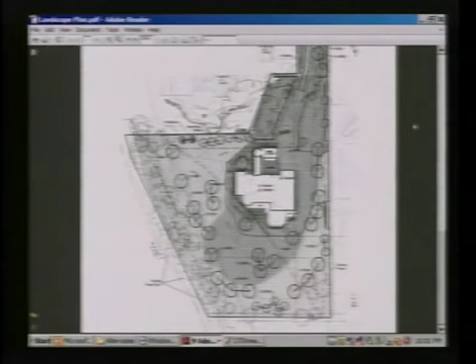I think now we will take it to discussion amongst ourselves. I'll start because I think Charlie made an excellent point. I think we ought to clarify the bulk issue amongst ourselves and decide whether that is something we would recommend these folks seriously address before we get too deep into design detail. Is that a fair assessment? Yes. If there do exist alternatives to address the bulk issue, then those should definitely be pursued.

How do we feel about a 2,200 square foot, approximately 25% variance to bulk? Is that something we would consider? Well, I would think it's more complicated than that. Or would we say that? I'd say absolutely not on my part.

I appreciate the amount of effort that went into this presentation, and this family's tried to do something very unique here - the fact that they've done this with a driveway, for instance, doing a pervious driveway. They're trying here, but the problem is the sheer mass of it. I can't in good conscience approve anything even close to that. Given the history here of not a new construction, not really approving any bulk, I'd personally say I'm not going to approve anything over bulk, even by a foot. That's just where I am.